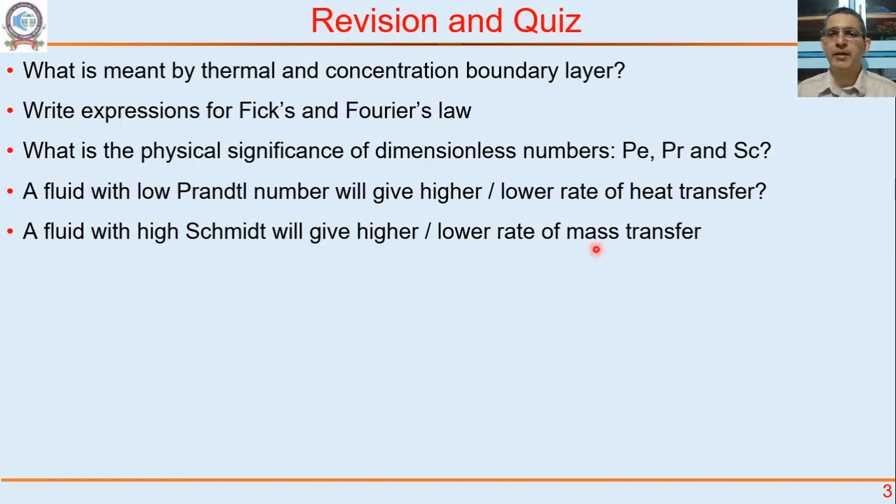A fluid with low Prandtl number will give higher or lower rate of heat transfer? That's the question, make your pick. A fluid with high Schmidt number will give higher or lower rate of mass transfer. Again, take your pick. So this will help you revise.

So Na, the flux, we are going to say is K, mass transfer coefficient, multiplied by delta C. Sometimes we write this K a little differently. We write this K, if for liquid phase, as KL. If for gas phase, as Kg, because sometimes mass transfer might be there in both the gas phase as well as the liquid phase. So just to know which phase we are talking about, we write it as K subscript L or K subscript G.

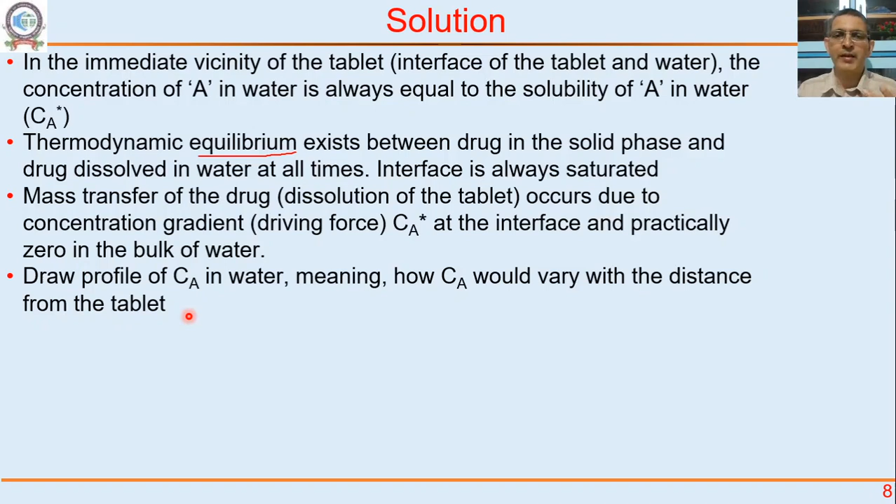This I don't need to consider. Flow is not turbulent, it's a no-flow stagnant situation, so microscopic balance is straightaway applicable. If microscopic is applicable we can solve this, so why go for macroscopic? We should not. If microscopic works, that's our first priority, because it always gives more information than going straight to macroscopic.

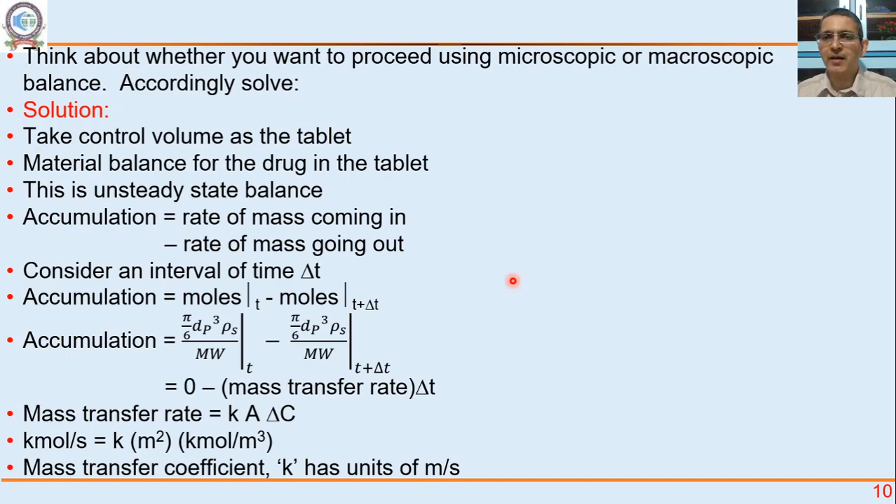At r tending to infinity, far away from the tablet, Ca is tending to 0. Diffusivity will cancel out, r just cancels out.

Now these constants of integration A and B, we have to evaluate using the two boundary conditions. If I use boundary condition 2, as r tends to infinity, Ca tends to 0, this implies that B has to be 0. So Ca would be minus A by r.

If you use the first boundary condition, at r is equal to dp by 2, Ca is Ca star, we will get the value of A. And then concentration of A we can write as Ca star dp by 2r. If you plot this profile, Ca by Ca star versus r, you will get a 1 by r dependence. Plot this and see for yourself.

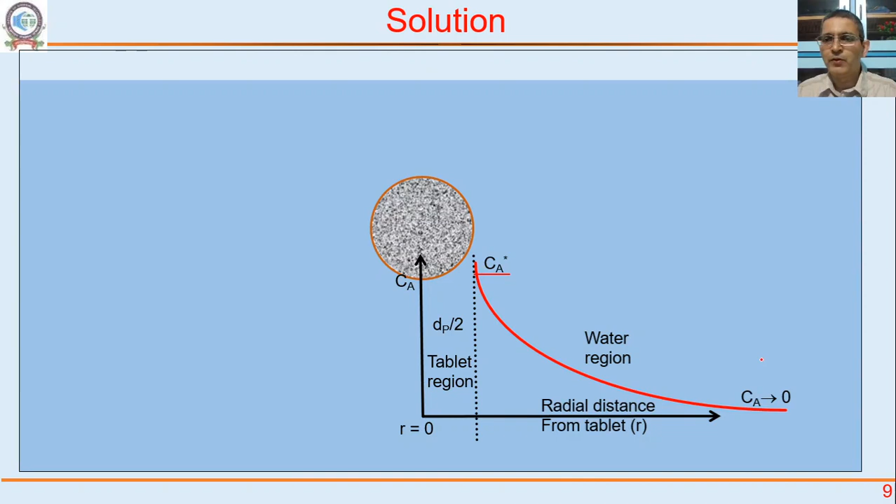Here are some things we need to talk a little bit more about. This Ca star is actually a driving force. It is actually Ca star minus 0, concentration difference, concentration driving force. What is the concentration driving force? Ca star to 0, that is the concentration driving force.

So what have I written? I have written flux is equal to concentration difference multiplied by all these other terms that are there. So this is the flux. Concentration difference, driving force, it is actually Ca star minus 0. But whether I write minus 0 or not, it's the same, it is the driving force.

So mass transfer coefficient would now be 2 molecular diffusivity divided by the particle size dp, diameter. So K would be 2 dm by dp.

Now look at this, I can rearrange this expression. K dp by dm is like a dimensionless mass transfer coefficient, just like we say friction factor is a dimensionless momentum transfer coefficient, tau w divided by half rho v square.

Just check, K is in meters per second, look at the previous slides. K is in meters per second, dp is in meters, molecular diffusivity is in meter square per second. So K dp by dm is a dimensionless mass transfer coefficient.

We are going to call this dimensionless mass transfer coefficient by a special name, in honor of the person who used it for the first time. We are going to call this the Sherwood number. Sherwood was a person who worked in the area of mass transfer. It is denoted as SH, Sherwood number. So Sherwood number is 2 in this case.

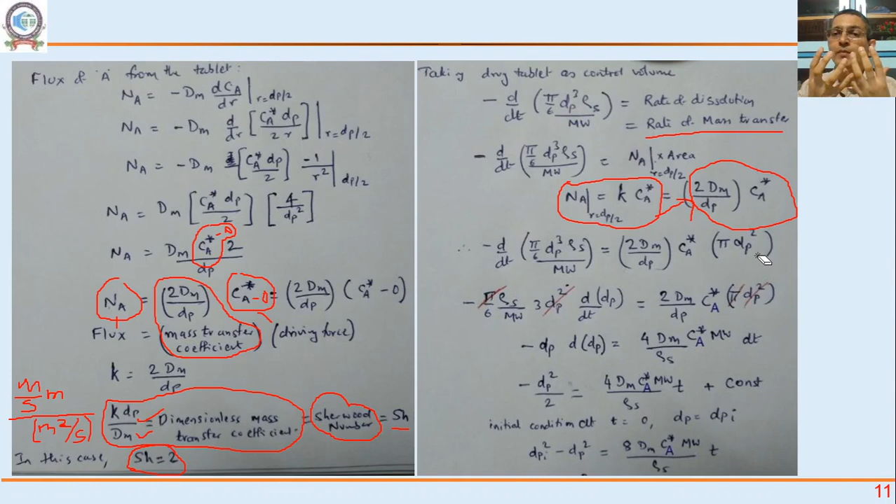Right, okay, so minus d by dt, just simplify now, it's straightforward. Ca star pi dp square, area across which mass transfer is happening, area perpendicular to the direction of mass transfer. Mass transfer is happening in the radial direction, so the area perpendicular to the radial direction is the surface area of the sphere, pi dp square.

Okay, simplify, you will get this expression. Integrate with respect to time. Now it's the first order differential equation in time. Integrate that, initial condition you will need, we call it as initial condition: t equal to 0, dp is initial diameter. So you will get this expression, dpi square minus dp square is equal to 8 molecular diffusivity Ca star molecular weight into time by rho s.

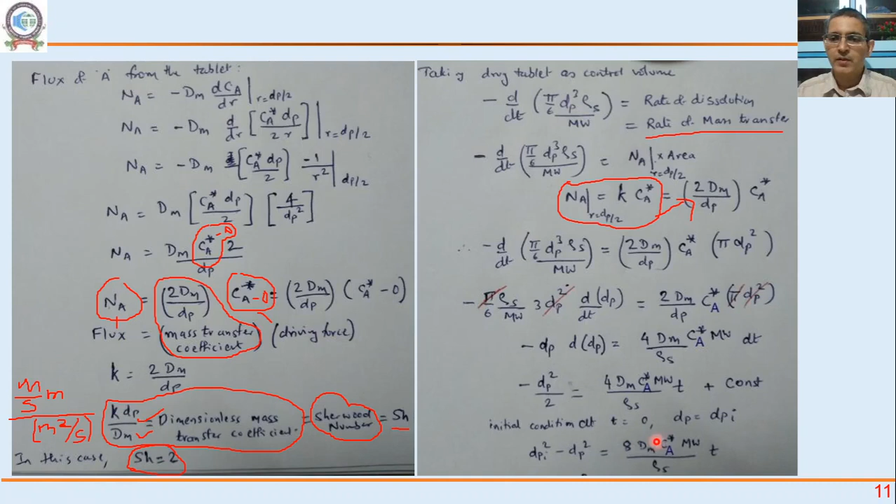This you should get on your own automatically now, based on whatever I have told you about. Once you get this, let's go forward. If you don't get this, go back and see where you have not got it. Once you get this, go forward.

Okay, so here look at the right side first, don't look at the left side. dpi square minus dp square is equal to this same expression as previous. I can divide throughout by dpi square, you will get 1 minus dp square by dpi square. I have divided by dpi square.

Now if I take mass, I want 90% to be dissolved, right? So I want to talk in terms of mass, so I have to relate the particle diameter to mass. How do I do that? dp cube into pi by 6 into rho s divided by molecular weight tells me the moles. So m by mi, mass at any time divided by mass initial, is dp by dpi cube.

So dp by dpi square, which is what I have here, is m by mi raised to 2 by 3. So I can substitute that now here. 1 minus m by mi raised to 2 by 3 is this bracket into t.

Now again, writing, advantage of writing in the dimensionless form. Left hand side is dimensionless. It's a ratio of mass at any time t divided by mass initial, minus 1 minus that number.

T by tau. So time, if I write tau would be rho s dpi square divided by 8 dm Ca star molecular weight, just the reciprocal of this. It's a dimensionless time, T by tau. So tau is the time scale for dissolution, meaning it is how much time is required for complete dissolution of the particle.

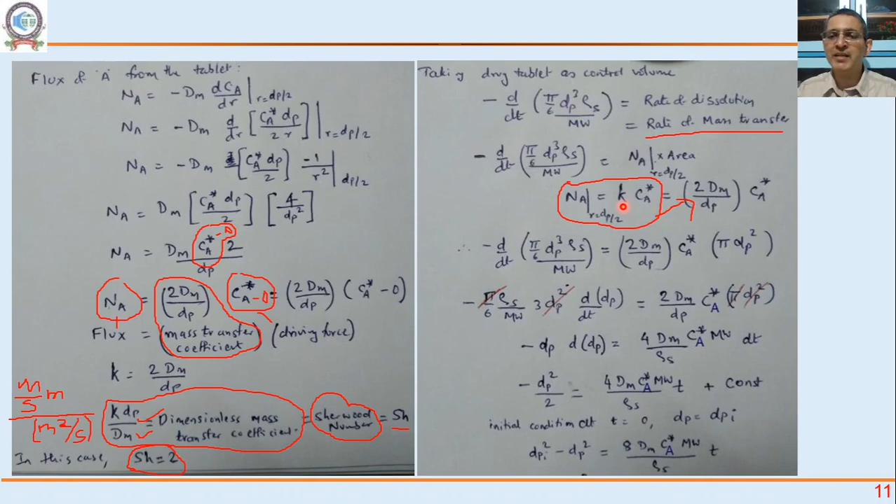Let's go forward. Another way of increasing the dissolution rate and reducing the dissolution time is if I can increase the mass transfer coefficient, because the rate is proportional to mass transfer coefficient multiplied by the concentration driving force. So if I can increase the mass transfer coefficient, how do I do that?

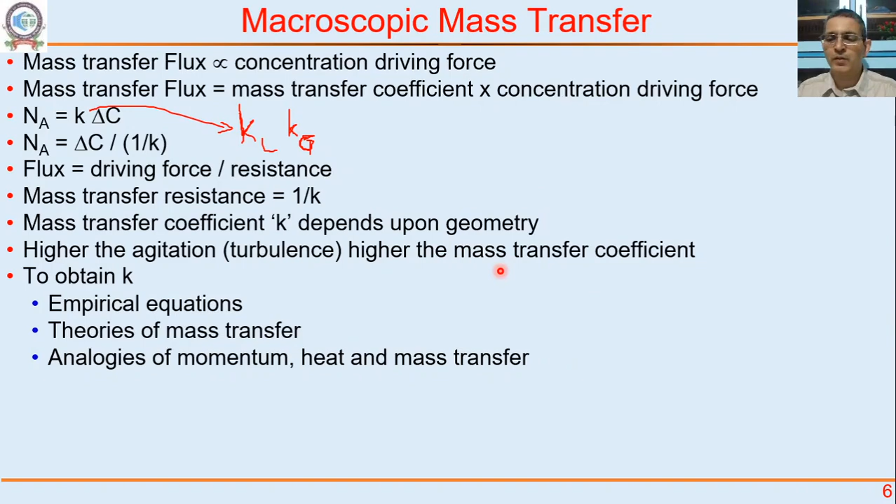Okay, here's the next problem. Water containing the tablet is now vigorously stirred to keep the tablet suspended in water. So there is always a relative velocity of the water with respect to the tablet, equal to its terminal settling velocity.

Now, how much time would be required for 90% of the tablet's drug to dissolve? So imagine water is there, the tablet is there, the drug tablet gets stirred, but because it is heavier than water, the relative velocity of the drug tablet with respect to water is equal to the terminal settling velocity, the slip velocity, the relative velocity.

Solve this problem. Pause the video and solve it for yourself. Only when you have solved it, go forward.

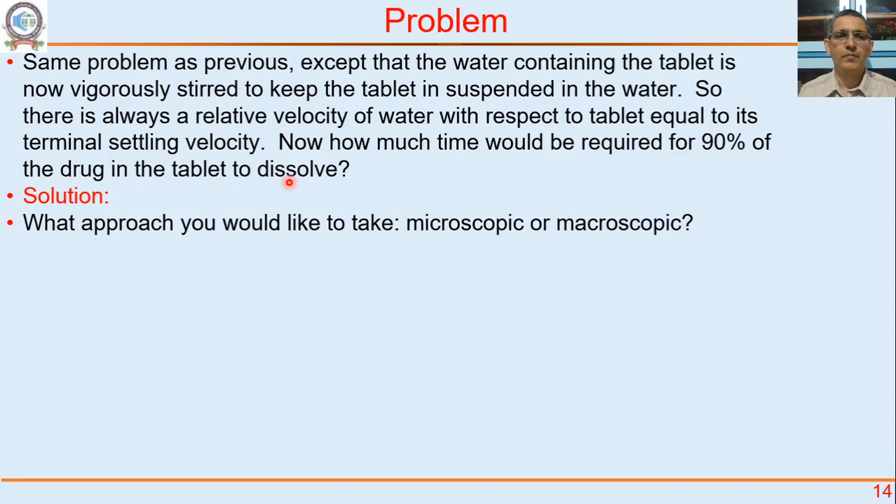What approach would you like to take? Microscopic or macroscopic? To help you decide, here is some mechanistic picture.

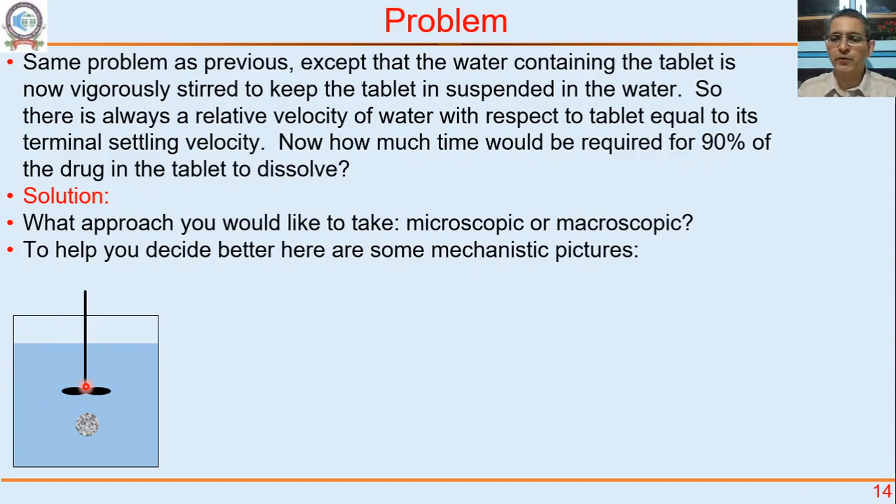So now if it is vigorously stirred, obviously we have turbulent flow. What do I do? Is the flow laminar, a no flow situation? No, that's not the case. Is the flow turbulent? Yes. Do I have turbulent diffusivity? Do I want a numerical solution? Well, I can, but it will take time to numerically solve a partial differential equation.

Let's go with a macroscopic balance instead. We are not going to use the turbulent microscopic balance; we are going to use a macroscopic balance. Let me erase this because we are going to come back to it again in the next problem.

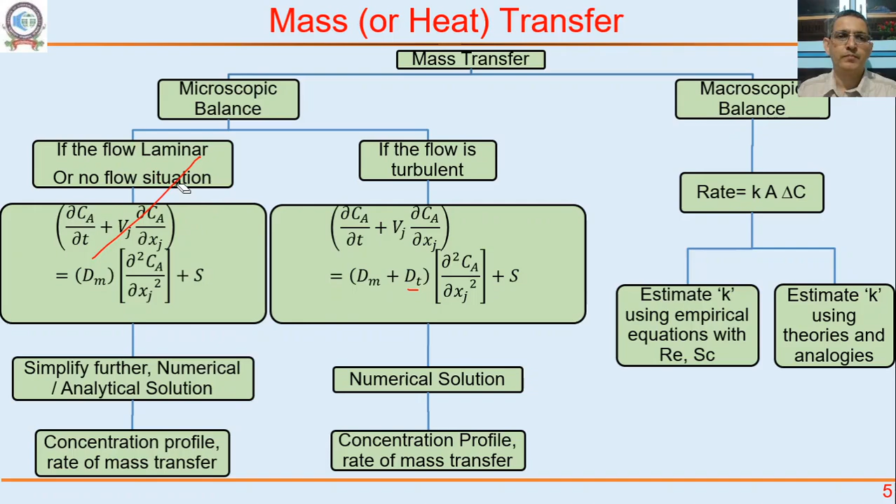Okay, here we are. Now can you solve with this macroscopic approach now that we have chosen it? Let me solve this problem also for you so that you are comfortable.

So due to vigorous agitation, flow will be turbulent. Therefore, if we use a microscopic balance, we need to numerically solve it, so we will go with a macroscopic balance instead. Again, accumulation equals rate of mass coming in minus rate of mass going out. What is our control volume? The tablet. Rate of mass coming into the tablet is zero. Rate of mass going out of the tablet is the mass transfer rate.

If I consider an interval of time delta t, mass transfer rate multiplied by delta t is same as before, the accumulation. Instead of mass, we should be writing moles. So this is minus Ka delta C, minus Ka Ca star minus 0. Water is still infinite, bulk concentration is still 0, so this term is still 0. This gives minus Ka Ca star.

Now how do I get the value of the mass transfer coefficient? Again the same question: empirical equations, theories of mass transfer, analogy of momentum, heat and mass transfer. Let's do some quick calculation.

Remember it is going to be dependent on Reynolds number, so I need to know the Reynolds number. For Reynolds number, I need to know the relative velocity, which is decided by the terminal settling velocity. If it is decided by terminal settling velocity, as particle size changes, terminal settling velocity also changes. Let's just, for our simplicity and understanding, calculate the terminal settling velocity for different situations, let's say the initial one.

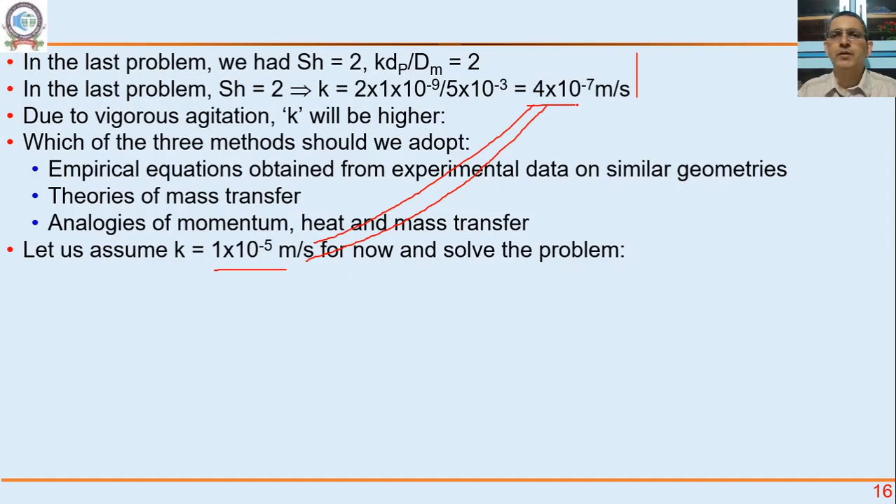That's how agitation helps. And fortunately, in our stomach and all that, motion is there that generates turbulence enough to increase the mass transfer rate, so that our patient feels relief very quickly within an hour. So that's why people advertise relief in 5 minutes, 6 minutes. On what basis do they calculate? They calculate based on this.

Now I'm going to give you the next problem, same problem as before. Relative velocity now is the terminal velocity. And empirical equation that relates Sherwood number is like this: Sherwood number is equal to 2 plus 0.6, Reynolds number to 0.5, Schmidt number to 0.33. This is for turbulent flow around a sphere. It is not applicable for anywhere else. It is applicable for turbulent flow around a sphere. People have done this by experiments and proposed this relationship.

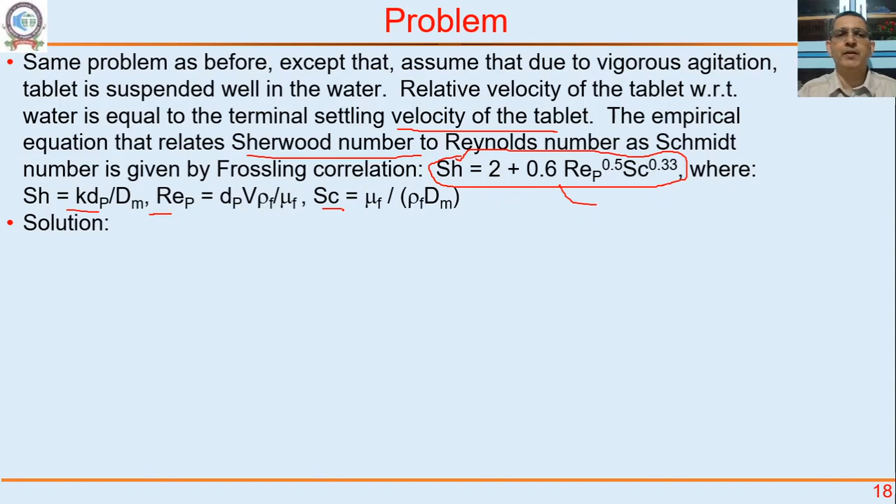Sherwood number, we have defined it earlier. Reynolds number we have defined earlier. Schmidt number we have defined earlier. Now, as particle size is changing, terminal velocity will change.

Let's look at this in a little bit more detail. So to calculate mass transfer coefficient, we need Sherwood number. For that, we need Reynolds number. For that, we need terminal settling velocity. To calculate terminal settling velocity, what do we need? Archimedes number. And Archimedes number will change on dp. It will be initially value will be something else, finally value will be something else. So if I look at Archimedes number based on dpi, it is 2.45 into 10 raised to 5.

That's highly turbulent. So CD is 0.44, right? So this means CD is 0.44. And terminal velocity can be written as 1.75 multiplied by square root of dp delta rho g by rho f. It's not Cp, it is CD. 0.44.

You see how momentum transfer is helping us to solve a mass transfer problem. How momentum transfer is helping us to solve mass transfer problem. That's why momentum transfer I wanted you to be thorough.

I have already written CD is 0.44. Right? Let's look at some values. At the start of the process, terminal velocity, if you calculate from this formula, is 0.17 meter per second. Reynolds number for the particle is 850. Sherwood number is 173. You can see that Sherwood number is far larger than 2.

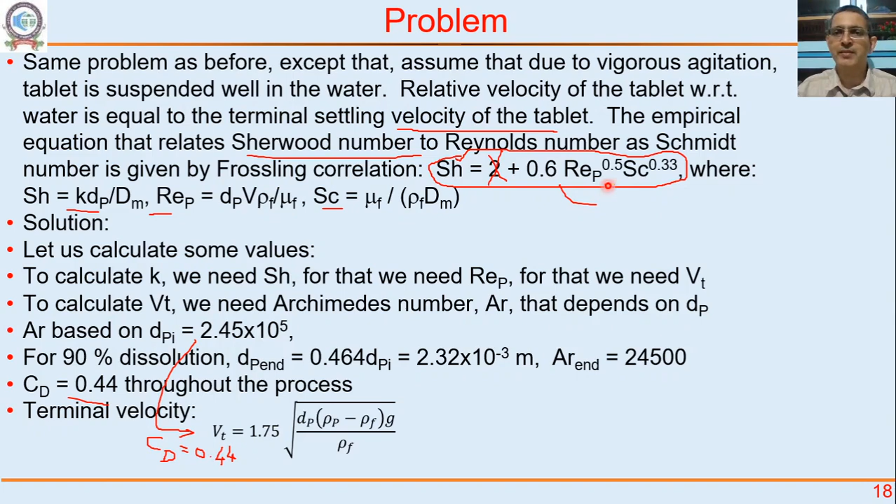Assume that due to constant stirring, the liquid side mass transfer coefficient is independent of particle size, with value KL equal to 5 into 10 raised to minus 6 meters per second. Normally Sherwood number and mass transfer coefficient depend on particle size, but just to make your life simple, I have given you a constant value of KL. Assume diffusivity of dissolved sugar in water is 1 into 10 raised to minus 9 meters square per second.

Now estimate the time required for 99% of the sugar to dissolve in water. One hint: as the sugar dissolves, this time water is not infinite, it is finite - 10 kgs is to be dissolved in 20 liters of water. So the concentration of dissolved sugar in the bulk of solution is not 0, it is finite. That's the hint. Solve this problem for yourself, pause the video and solve it.

Here's the solution. When 99% of sugar dissolves in water, 10 liters... our concentration of sugar is 10 - where is that? 10 kgs of sugar, 99% of that in 20 liters of water. So it should be 20 liters of water. It should be 20, let's make that correction.

99% sugar dissolves in 20 liters of water. So mass of sugar dissolved form is 0.495 kg per liter, or 1.447 kilomoles per meter cube.

Now this is large as compared to Cs, it's not zero. So the driving force is 4 minus 1.447 if everything is dissolved. And as more sugar dissolves, the concentration of sugar in the solution increases.

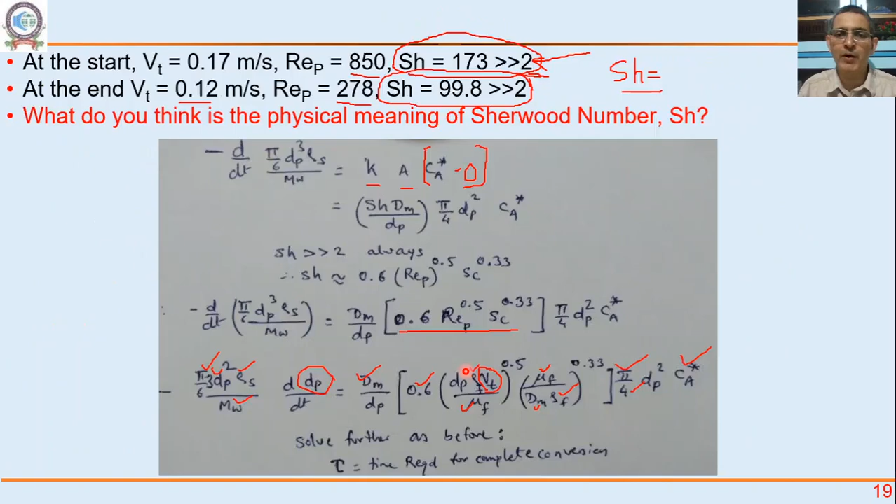So if you think about it, earlier we had Ca star going to 0, but now that's not going to happen, because the liquid is finite. Initially it may go from Ca star to Ca equal to 0, but after some time, as sugar dissolves, Ca goes up, and after some time it will look like this.

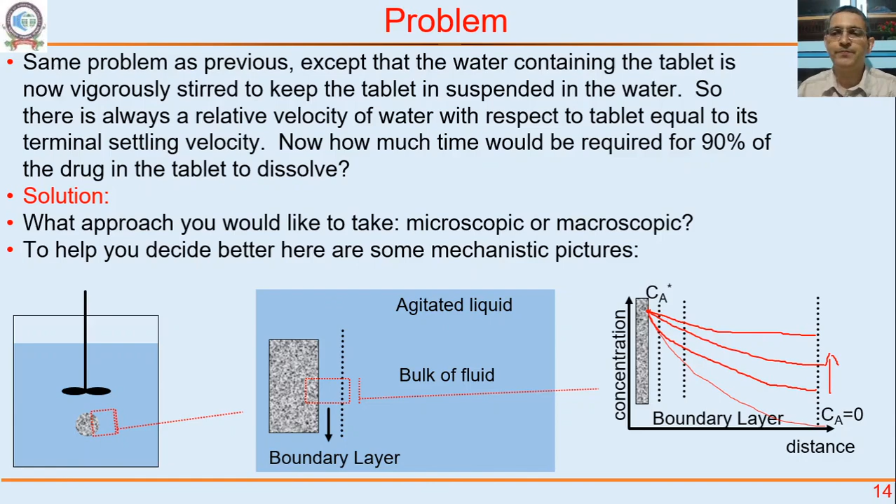The Ca is going to build up with respect to time, so the driving force is going to change with respect to time. Account for that.

So if you have not solved it already, now with these hints, solve it. Pause the video and solve it.

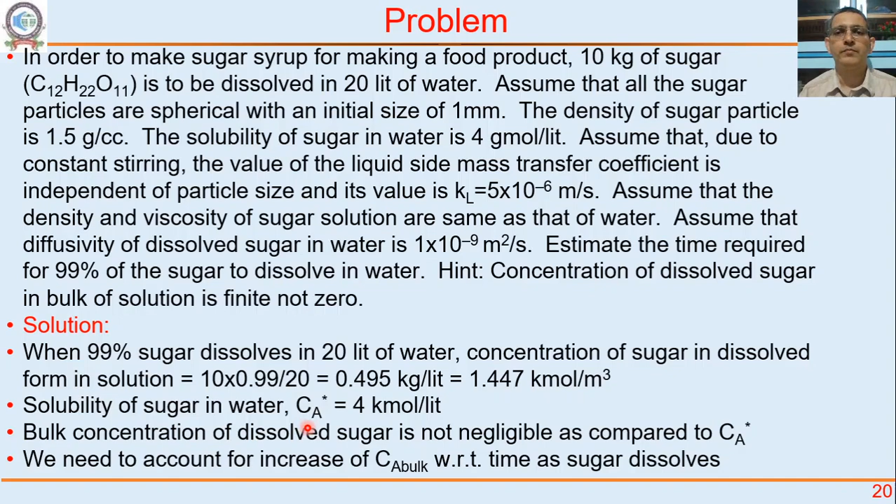Here's the solution. Let NP be the number of sugar particles, which remains constant — particles don't disappear, all dissolve at the same rate, and each particle is dissolving. Let VL be the volume of solution, also constant at 20 liters.

So as before, minus d by dt of the number of particles times pi by 6 dp cube rho s by molecular weight — this is for one particle, multiply by number of particles — that's the total solid balance, as if my control volume is all the solids put together.

This equals KL into A into delta C, so KL into NP into pi d square, the surface area of all the particles. KL is the liquid side mass transfer coefficient, times Ca star minus Ca bulk.

Ca bulk is not 0, it is not constant — Ca bulk is the concentration of dissolved sugar in water, and it increases with time as more sugar dissolves. So to get Ca bulk, we need to write a balance on sugar remaining in solid form and sugar in dissolved form. Do that, pause the video, go forward from this point.

Here is the solution. What is the initial moles of sugar? NP into pi by 6 dp cube rho s divided by molecular weight — that's the initial moles of sugar in the solid form.

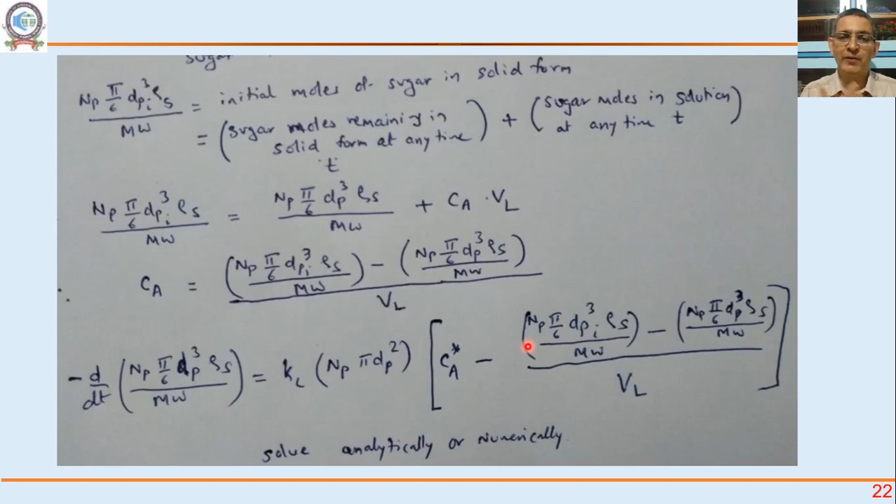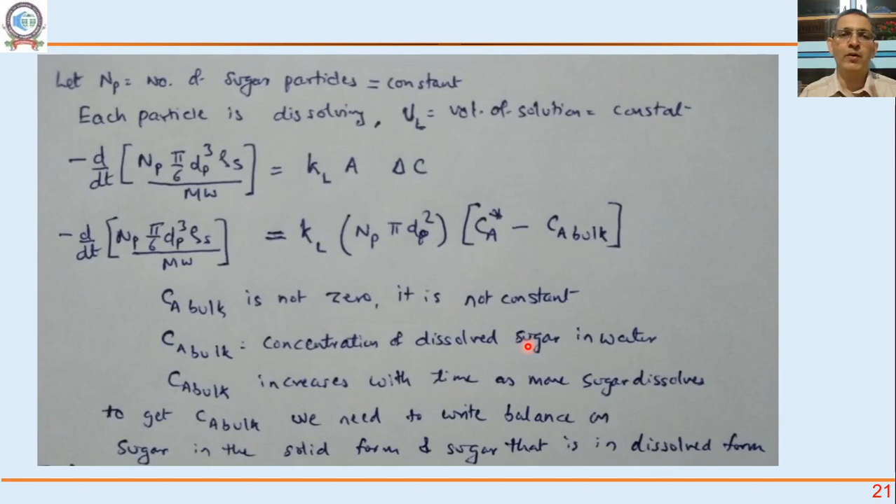So next time somebody in your family is preparing a sugar syrup, you can tell them exactly how long they need to stir, how much sugar will remain undissolved, and how much will dissolve at any instant of time, provided you know the mass transfer coefficient properly, or if you know the data, you can back-calculate it.

Whatever we have discussed so far is covered in two parts of Welty's Momentum, Heat and Mass Transfer book: chapter 28, sections 28.1 to 28.3, which talks about stagnant medium and so on, and chapter 30, which gives mass transfer coefficient relationships in terms of Sherwood number, Reynolds number, and Schmidt number for different situations.

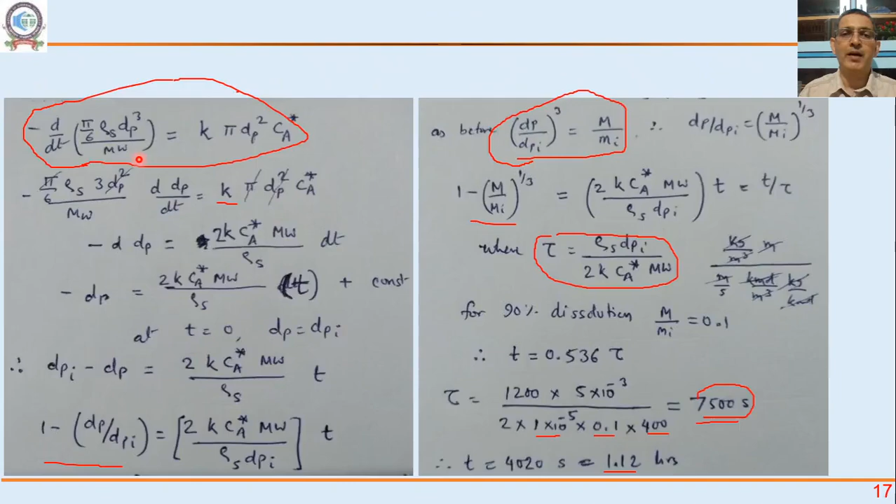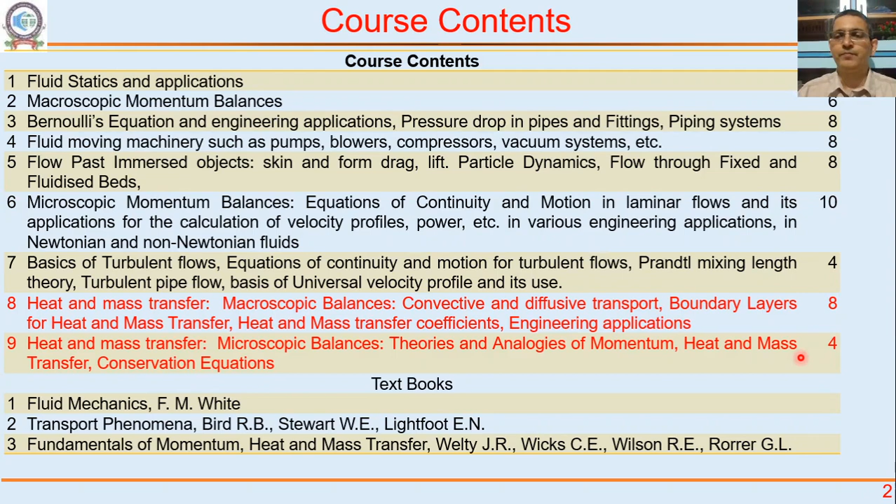Read these two chapters and solve problems from the back of each — there are several problems given. Solve some of them; that's why we have kept 12 hours for this part. Lectures won't go on for 12 hours, you'll need time to solve the problems, that's why this time is allotted. So solve problems from the book, and get all these concepts: how we take balance, how we write mass transfer rates.

We'll stop here. In the next class, we will solve some more problems.